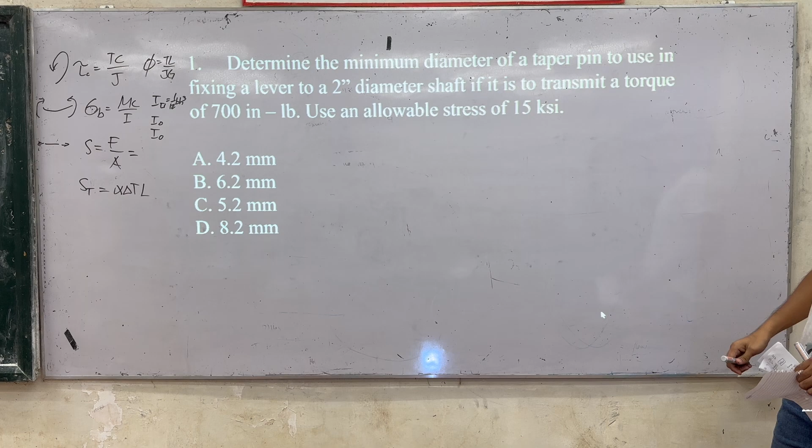So we have here: determine the minimum diameter of a taper pin to use in fixing a lever to a 2-inch diameter shaft if it is to transmit a torque of 700 pound-inch. Use an allowable stress of 15 KSI. So if we have here a pin.

So ano yung mga given dito? Ano yung hinahanap? Compute the stress. Ano bang stress dito? Ito, no? So this is basically yung stress natin, SL over E. So ito, given, ito siya hinahanap. Given ba yung L? Given. Given ba yung E? Okay, given. So therefore, yung S natin is basically delta E over L.

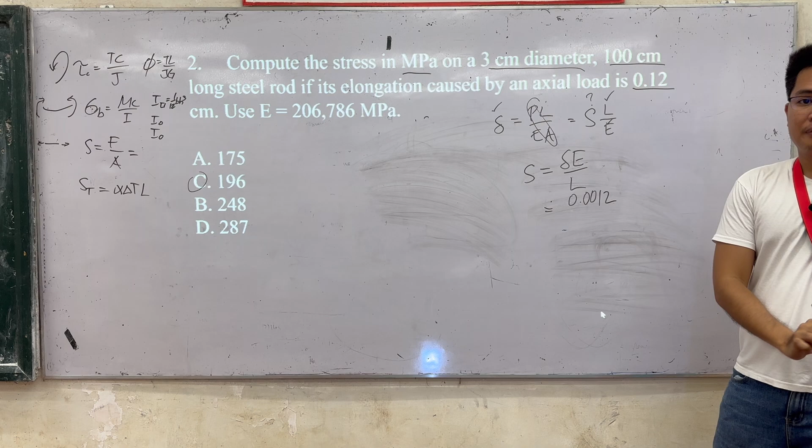So this one here is 0.12 cm siya. So 0.0012, tama? Para ma-meters. And then times E, we have 206,786 times 10 to the 6 over yung L natin. Ano yung L? 100, no? So we have 1. 248. Okay. So the answer number 2 is 248. Klaro?

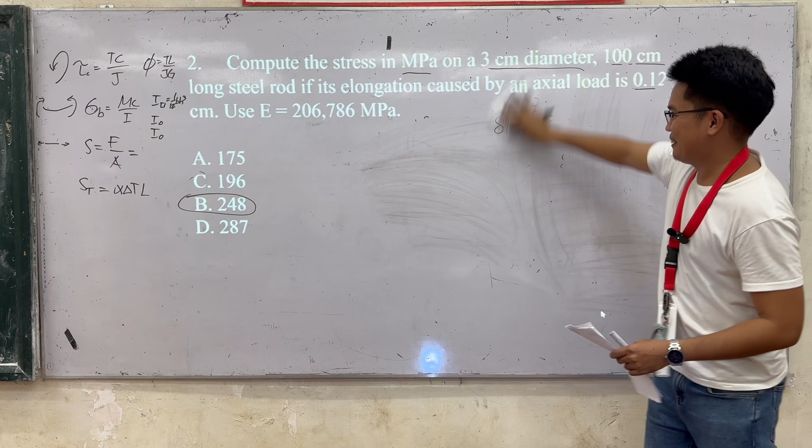Sige, number 3. Makinig. How many 5/16-inch holes can be punched in one stroke in a plate made of SAE 1010 steel, 7/16-inch thick, using a force of 55 tons? The ultimate strength for shear is 50 KSI, no? So meron na tayong plate, no? Yung plate natin is meron tayong mga holes.

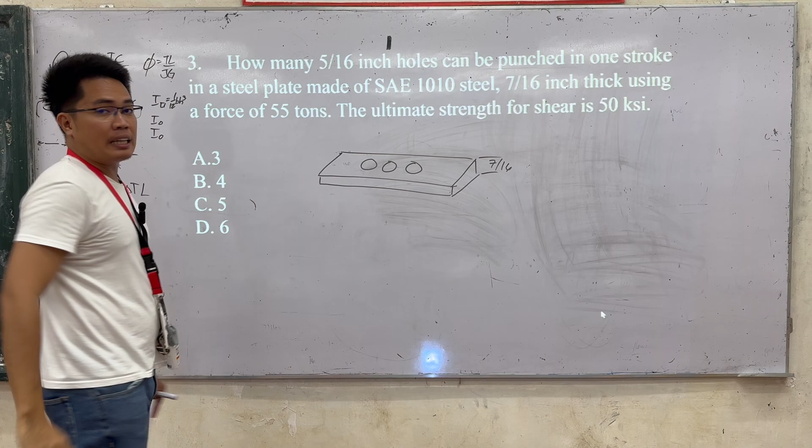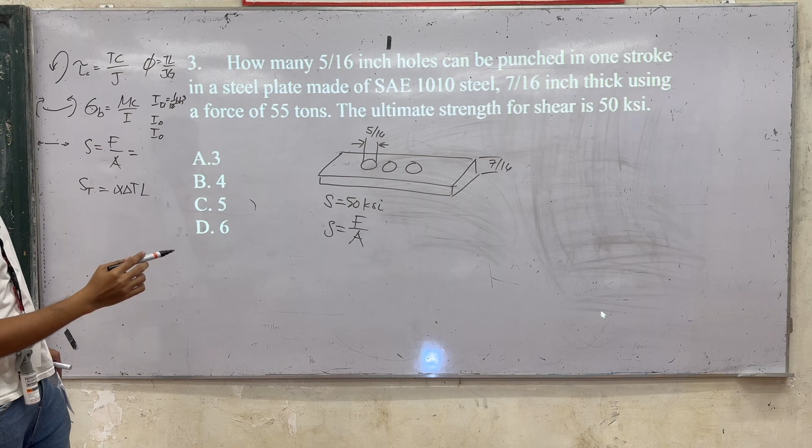And then yung thickness ng plate, given ba o hindi? Given, ano yung thickness ng plate? 7/16. Pero hindi natin alam kung ilang hole. Alam lang natin that yung diameter nito is 5/16. Now, alam din natin kung ano yung ultimate strength for shear. So yung shear natin is 50 KSI. Ano yung formula ng stress natin for shear? We have force over area. Given na tayo ng force? Okay, given tayo ng force, 55 tons.

Now, to calculate the area, ano yung shearing area natin dito? Kung hole natin is pa ganyan, so kung i-stretch natin yan, yan yung shearing area natin, tama? So yung thickness nito, the same as dito, 7/16. How about the length of this one? Paano natin yan kunin? It's just the circumference of this one. So ano yung formula sa circumference?

We have pi d. Pi d lang. 2 pi r yung isa, di ba? So pi d. So ano yung diameter natin? 5/16. Tama? So we have 5/16. So tinatanong ilang holes, no? So lagyan natin ng n para ilang holes yan. So therefore, yung formula natin is n is equal to F over SA.

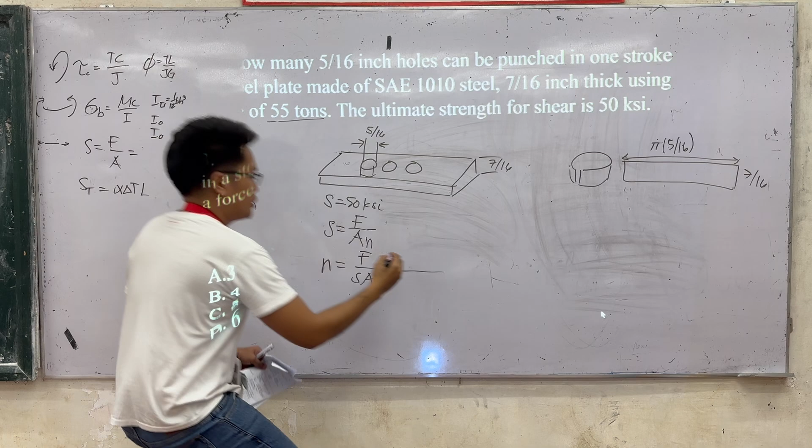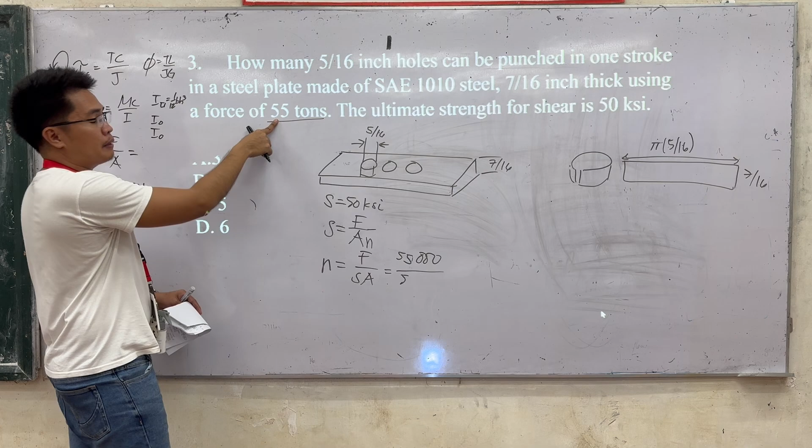So ano yung F natin? 55 tons, no? Tons meaning times 1,000. So we have 50,000. And then yung S natin, ay wait lang, it's 55 pala. Ha? Ano? Then yung F muna, yung F natin is 55 tons, di ba? So 55. Then yung S natin is, ilan yung S? 50, no? So this is 50,000 kasi KSI.

And then yung area natin, this whole area here, base times height lang, no? So ano yung base natin? Pi times 5/16, times height, 7/16. Calculate yung n natin, that is equal to, sige, ito.

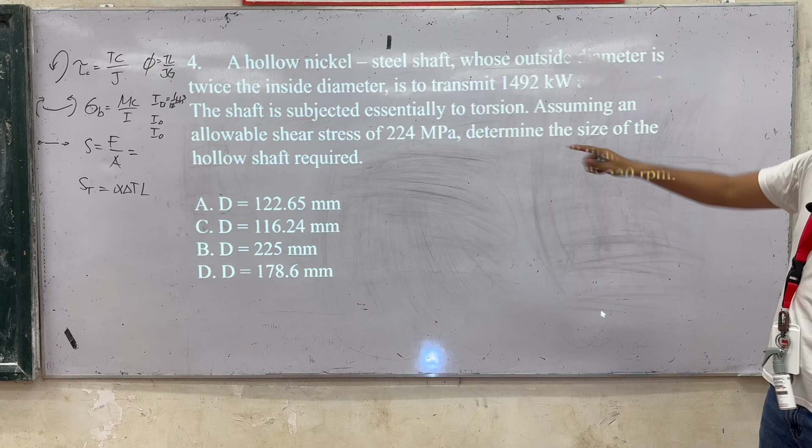A hollow nickel steel shaft whose outside diameter is twice the inside diameter. So ibig sabihin, yung diameter sa outside is equal sa twice the inside, kasi hollow siya. Is to transmit a power of 1492 kilowatts at 220 RPM, omega to. The shaft is subjected essentially to torsion, assuming an allowable stress of 224 MPa.

Determine the size of the hollow shaft required. So yung malaking diameter. Since nag-involve to ng torsion, ano yung formula ng stress involving torsion? The stress is TC over J. And then yung J natin dito, since hollow, that is pi over 32 times D to the 4 minus d to the 4. Now, yung d natin dito is 1/2 D, kasi 2 times. So now we have J here.

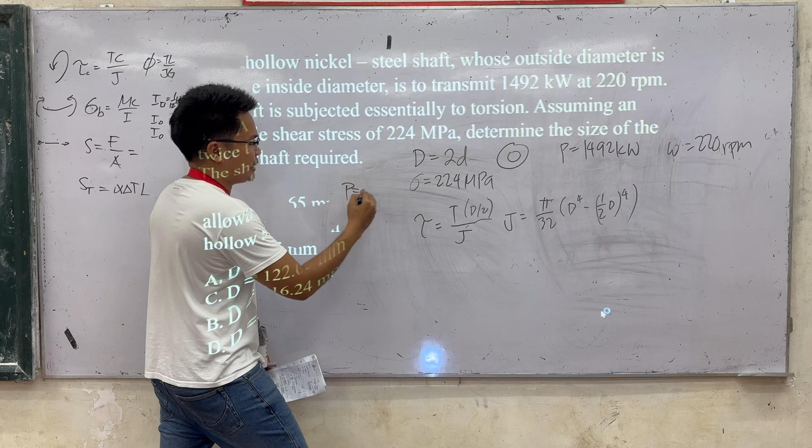Ano ba yung C natin dito? D over 2, yung outermost. So this one here is D over 2. And then ano naman yung torque natin dito, yung T natin? Wala pa. But we know that, ano yung formula ng power? Power is just T omega. Tama? So yung torque natin is just P over omega. So ayan lang, substitute natin. Ano yung stress ulit? 224.

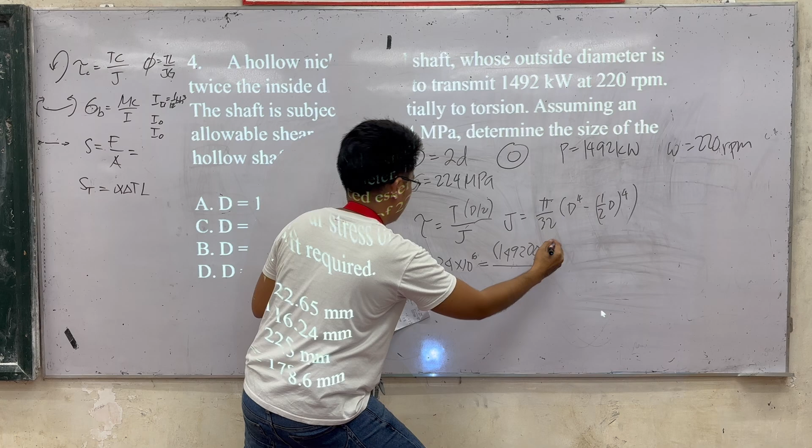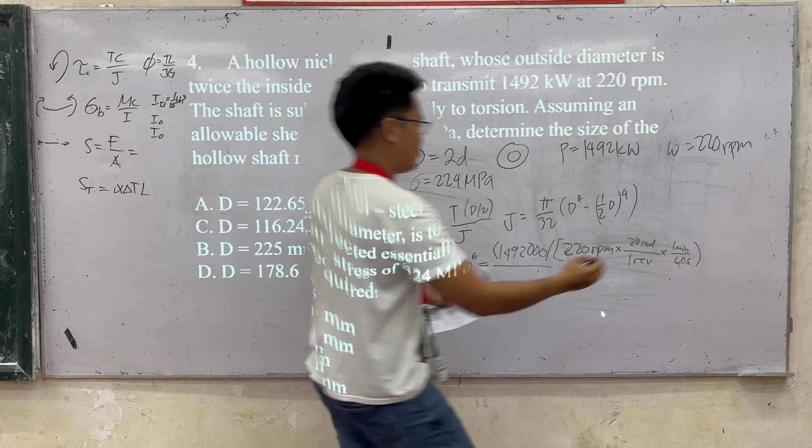So, we have here 220 RPM. Multiply by 1 revolution is just 2 pi rad, times 1 minute, 60 seconds. Yan dapat. Tama ba? Okay. Then ano pa yung kulang? D over 2. So we have here D over 2, over J, which is pi over 32, D to the 4 minus 1 half D to the 4.

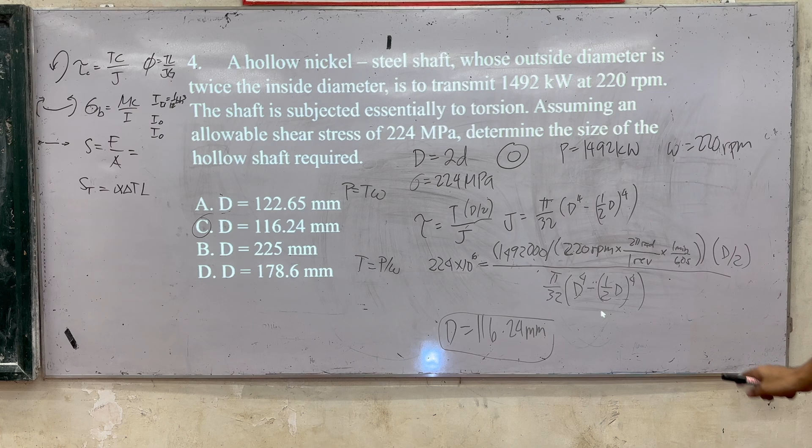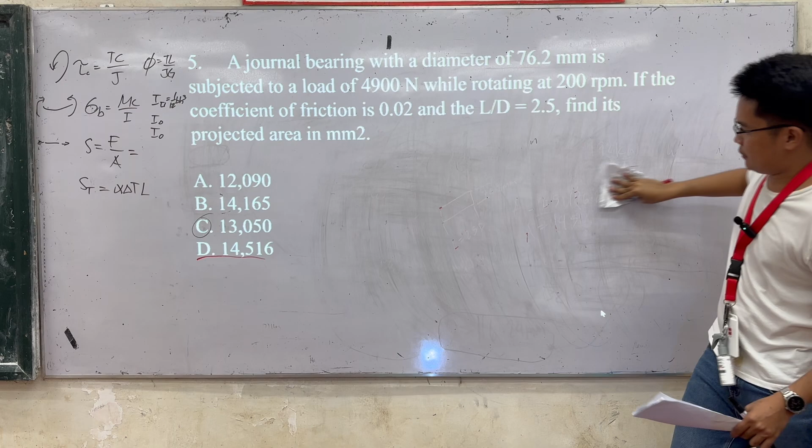Number 6. The shaft whose torque varies from 2,000 to 6,000 inch-pounds has a 1 1/2 inches in diameter and a 60,000 psi yield strength. Compute the shaft mean stress. Paano natin yan i-solve?

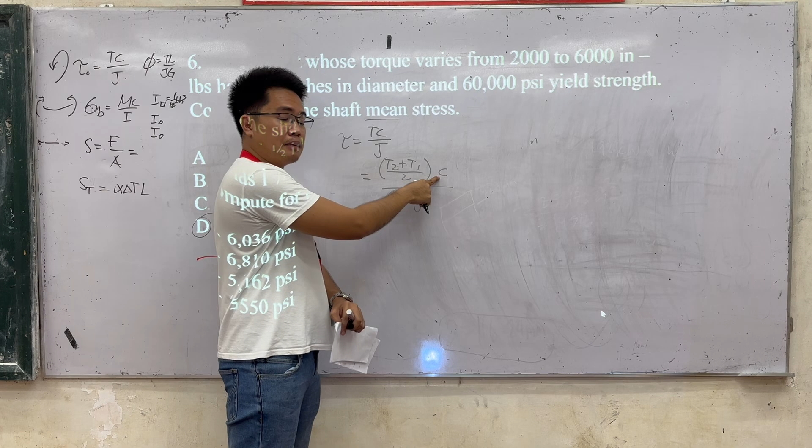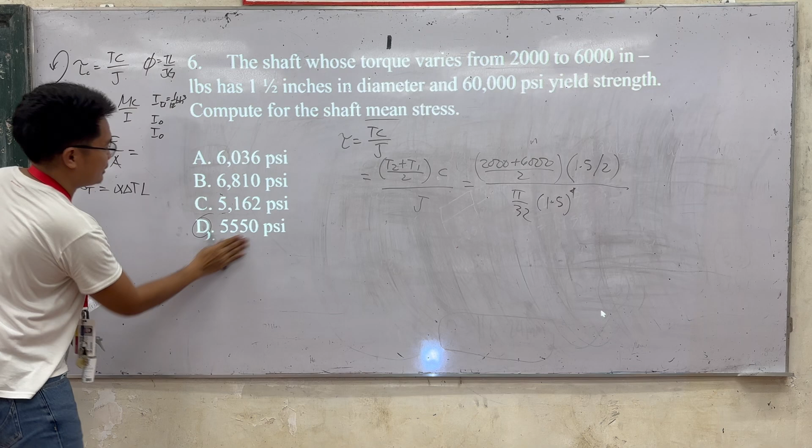So we have 2,000 plus 6,000 divided by 2 times, ano yung diameter? 1 and 1/2, 1.5, divided by 2, kasi yung C natin is just half the diameter. And then, pi over 32. So, we have here 1.5 to the 4. Okay, ito yung sagot, letter A. So, ayan lang. Again, the mean is just the average.

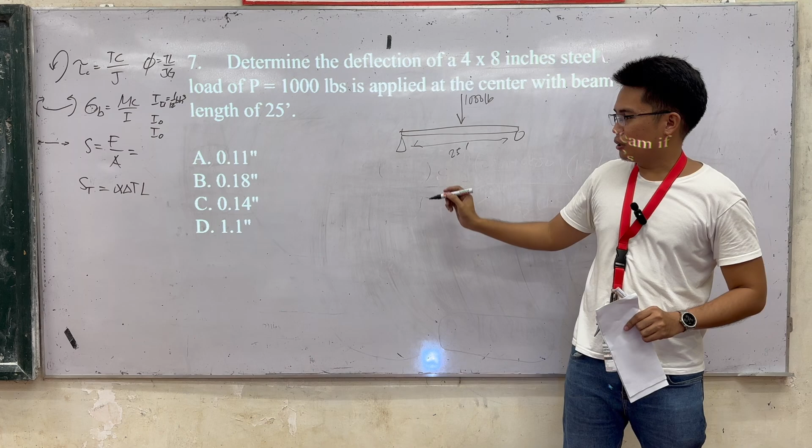So if we have a simply supported beam na may force applied at the very center, yung formula lang is just negative P L cube over 48 EI. Ayan lang. Kasi kapag dinerive mo pa ito sa board exam, mauubusan ka ng time. No? So yung ginagawa is i-memorize nyo talaga yung table. Memorize yung table. So ayan lang.

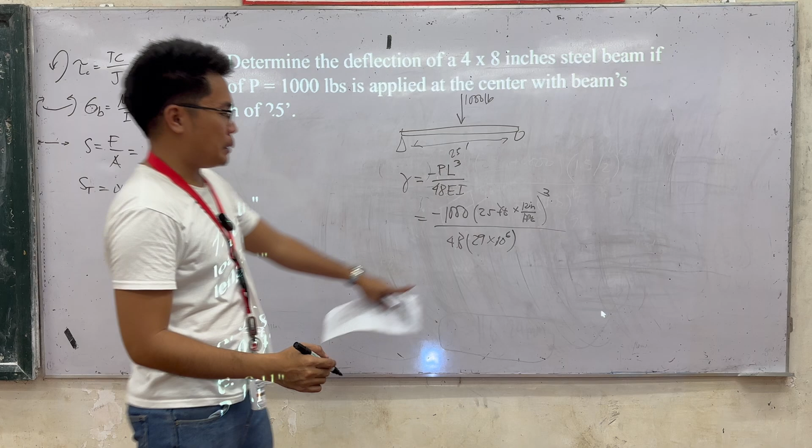So meron tayong negative 1,000 pounds and then yung length natin is 25. So 25 feet times 12 inches over 1 feet. Cancel. So ayan. Cube. Over 48. Then given ba tayo ng E? Pero sinabi na steel. So that is inches yung gamit natin. So we have 29, di ba? Ha? 30 yung ginagamit. 29 ako naandan. 30 times 10 or 29 times 10? Times 10 to the 6, no? Kung GPa to, this is 200, no?

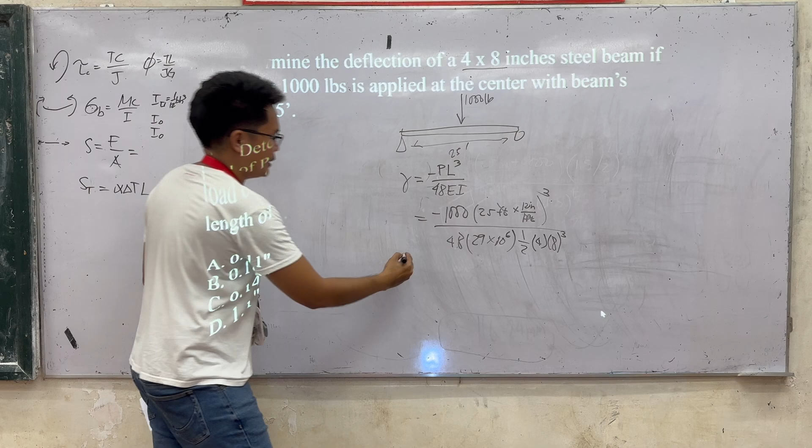So, ayan. And then, yung I natin. Ano yung I natin? Yung I natin is 1 over 12 BH cube, no? Ano yung base natin? 4. Then yung height natin, 8 cube. So, ayan lang. So, yung gamma natin, this is equal to ito, 1 over 12 pala to, 1 over 12 BH cube. 0 point? Okay, 0.11. Letter A.

No? May nakapasa na? May naka-perfect sa 1 to 7? Sino? Siya? Masanang? Ay, Mansang Masanang. Top 1? Congrats, no? Sige, number 8.

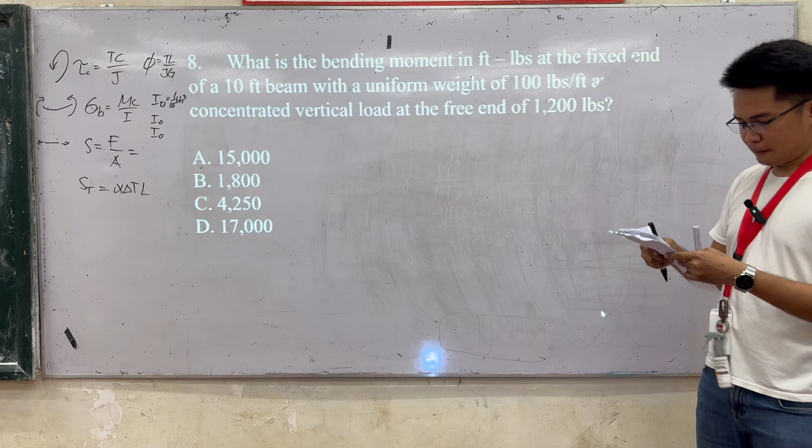What is the bending moment in feet-pounds at the fixed end of a 10-feet beam with a uniform weight of 100 pounds per feet and a concentrated vertical load at the free end of 1,200 pounds. So anong klaseng beam meron tayo dito? We have fixed yung end, so that is cantilever beam, no? We have now a beam. Applied at the end, ano yung force na in-apply sa end? 1,200 pounds. Then meron tayong uniform weight na nilagay dito.

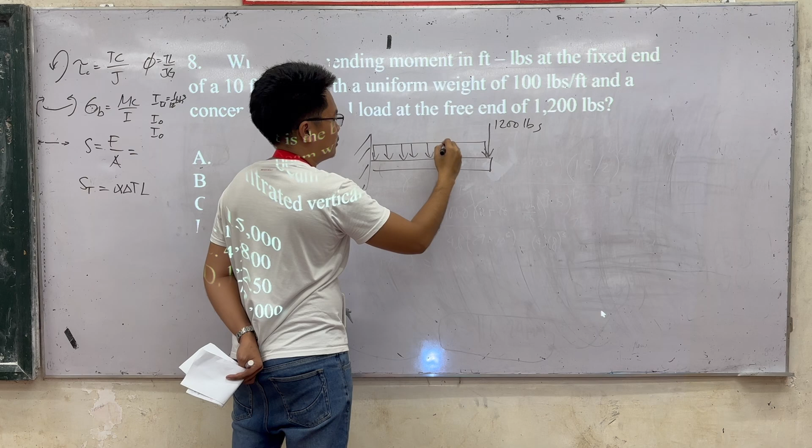That is 100 pounds per feet, tama? Then ano yung feet natin dito? We have 10. Ano yung tinatanong? What is the bending moment, no? So ano yung gagamitin formula? Summation of moments lang. Summation of moment at this point, counterclockwise, positive. So this one here, M, that is positive. And then ito siya is negative 1,200 times, wait lang, this is 10 feet. Lagay lang natin 10 feet.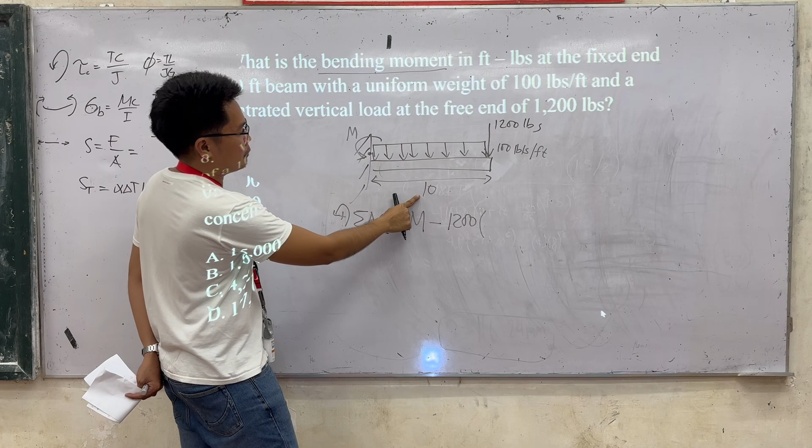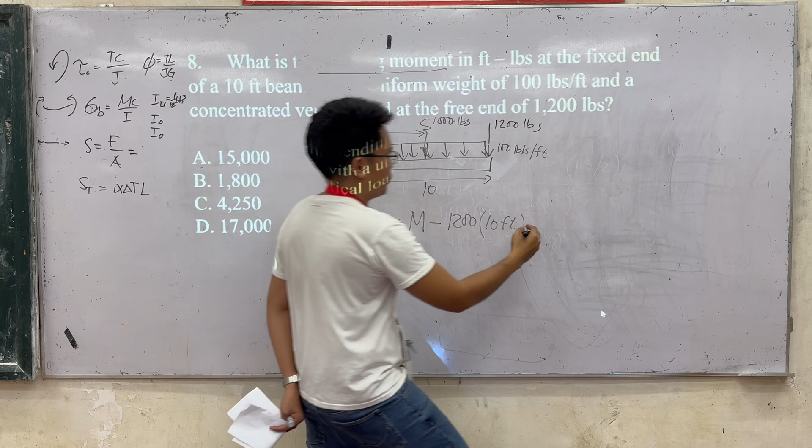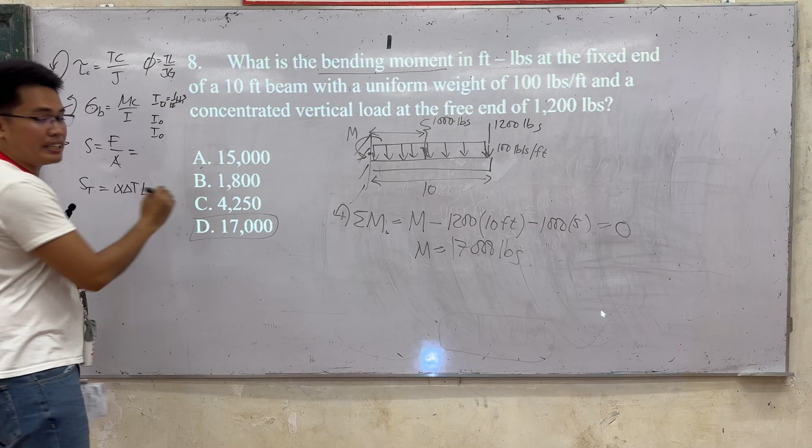And then itong uniform, ano yung gagawin natin dito? Papalitan natin ng concentrated. So that is just 100 times 10. So we have 1,000 pounds. Tama? Then yung moment arm niya, pila? That is 5. So we have minus 1,000 times 5. That is equal to 0. So i-solve natin yung M. Makakakuha tayo ng pila? 17,000 pounds. So we have letter D. Follow? Sige.

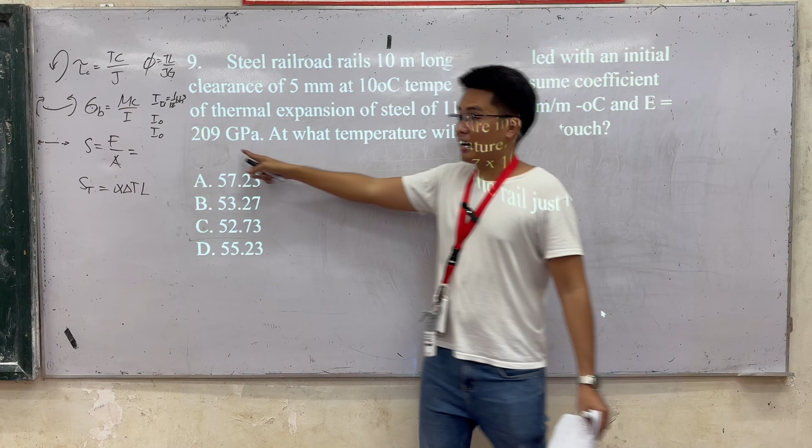Next. Number 9. Steel railroad rails 10 m long are installed with an initial clearance of 5 mm at 10 degrees Celsius temperature. Assume the coefficient of thermal expansion of steel of 11.7 times 10 to the negative 6 and E as 209 GPa, dili 200. At what temperature will the rail just touch? Ano yung rail sa train? So yung rail is ito, dito. Composed na siya ng mga putol-putol. Then may clearance yan, kasi kapag iinit yan, mag-i-expand, so binibigyan ng clearance. So initially, meron tayong 5 mm na clearance at a temperature na 10.

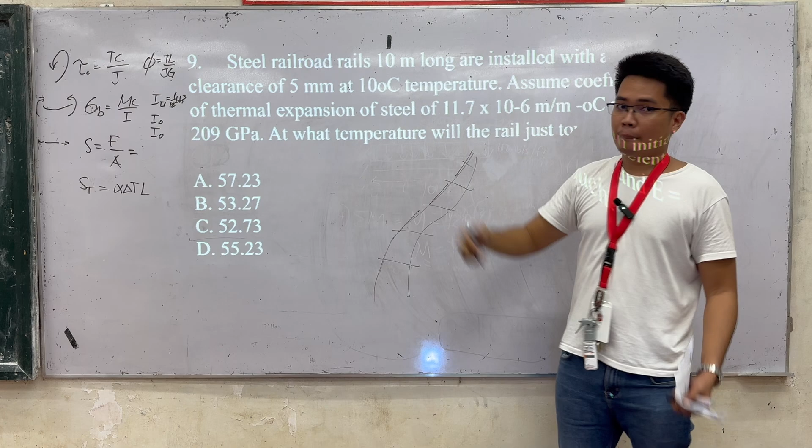So ano yung formula? Deformation temperature. This is our clearance. So ano yung clearance natin? 5. So 0.005 is equal to, ano yung alpha? 11.7 times 10 to the negative 6. And then, ano yung delta T? We have TF minus T initial. Ano yung T initial? 10. And then yung L natin, 10. So ayan lang. So masosolve na natin to. Very simple. So pila na siya?

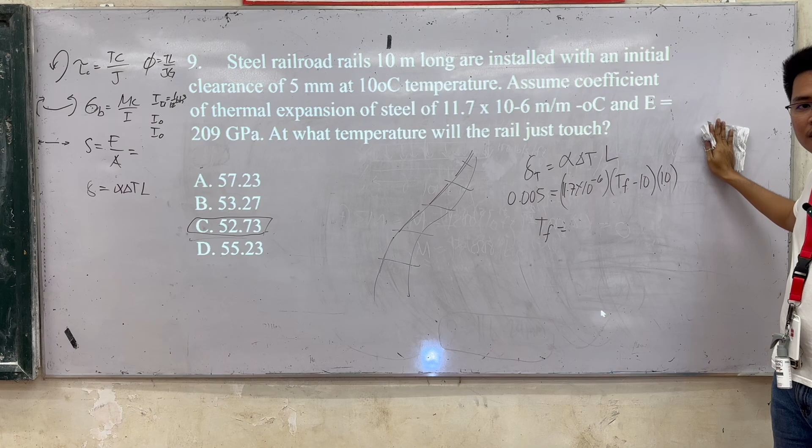Okay, 52.73. Okay? Sige, proceed tayo. Sige, ito daw, easy na to?

Very easy. An 8 inches long steel has a cross-section area of 0.25 inch squared. After a load of 5,000 pounds has been applied, the length is found to be 8.0065 inch. Find the unit stress. So ano yung formula natin dito? Okay, force over area lang, no? So stress is just force over area.

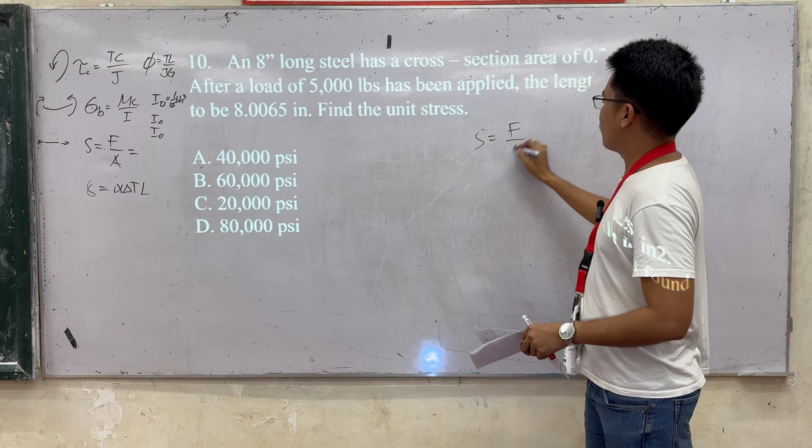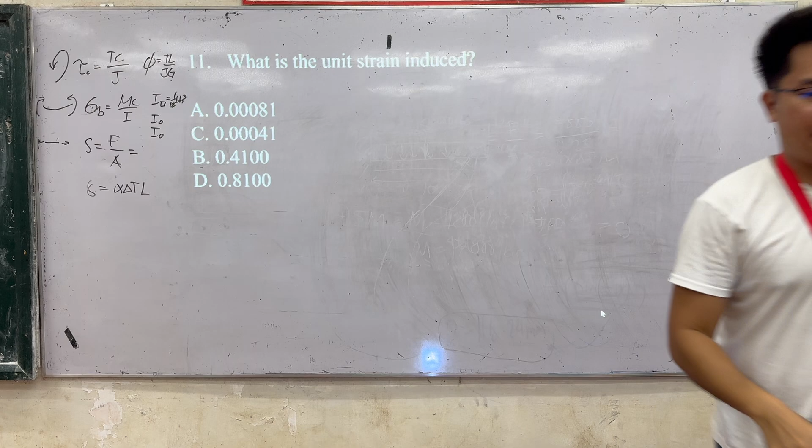Sige. What is the unit strain induced? So yung kanina na problem, i-calculate natin yung strain. So ano yung formula ng strain natin? Epsilon is just delta L over L. Tama? Ano yung delta L natin? Di ba yung original 8? Then nag-expand, 8.0065. So yung delta natin is?

Okay. So we have here 0.0065 divided by 8, the original length. So ito siya, this is equal to letter A? Letter A, salip ko ninyo ha. I-calculate letter A. Sige, letter A.

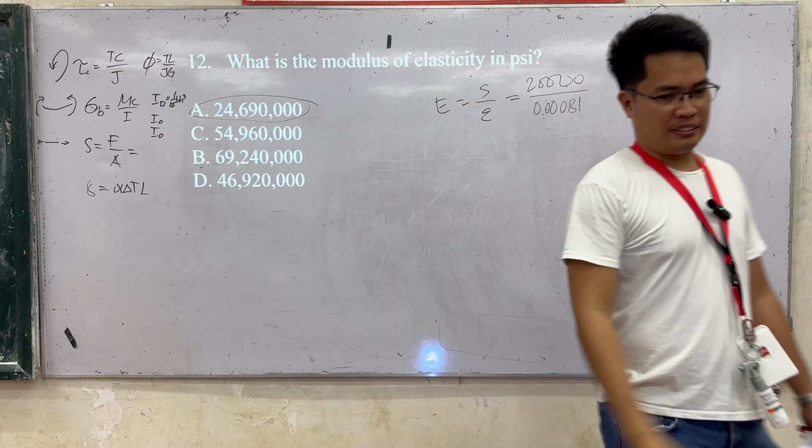Sige, number 12. What is the modulus of elasticity in PSI? Ay, connected siya kanina, no? So we have E is equal to stress over, ano pa yung simbolo ng strain? We have gamma? Sorry. So, ayan. So, the modulus of elasticity in PSI. So, ano yung stress kanina? 20,000. And then, ano naman yung strain? 0.0008. Tatlong zero. So, ayan lang. The answer is? So, letter A. So, sige, number 13.

A hollow steel tube with an inside diameter of 80 must carry an axial tensile load of 330 kilonewton. Determine the smallest allowable outside diameter of the tube if the working stress is 110. So anong klaseng load meron tayo? Axial, no? So if we have axial load, ano yung formula? Force over area lang. Ano yung hinahanap? Determine the diameter. Given ba tayo ng stress? Given tayo ng stress. Given ba tayo ng force? Given tayo dito.

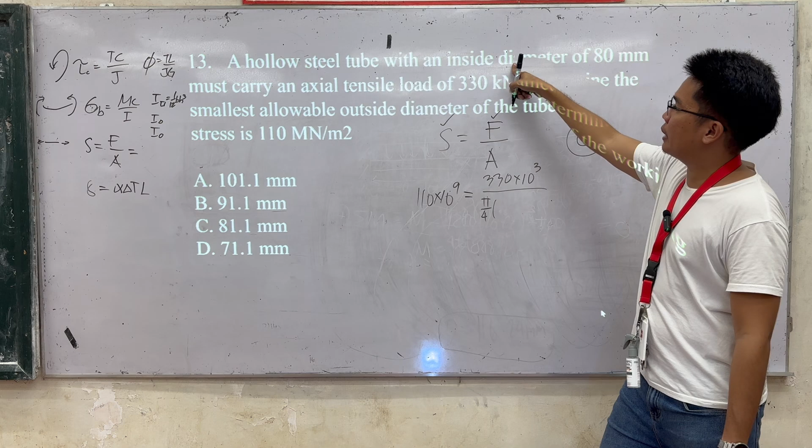Anong area meron tayo? We have a hollow area. So ano yung stress? 110 times 10 to the 6 is equal to, ano yung force? 330 times 10 to the 3. Ano naman yung area? So malaki minus maliit. So ano yung malaki? Pi over 4. Ano yung diameter? Inside diameter yung hinahanap. Tube with an inside. Ay, hindi pala. Ito yung hinahanap, no? D squared, minus, ano yung Di? 0.08 squared. So, ayan lang. Shift solve lang natin to. D is equal to 101.

Letter A. No? Lalo pa, may naka-perfect. Ipopost ko sa taas yung top notcher, ha? Sige. Walang tanong. Follow lang. Number 14. Meron pa tayong 30 minutes.

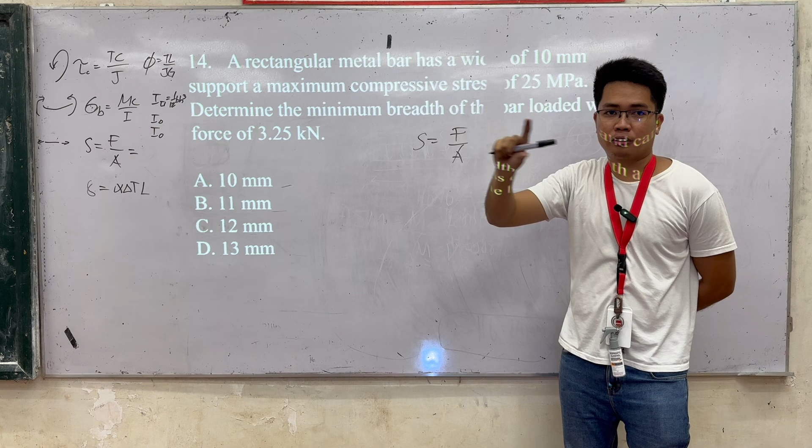A rectangular metal bar has a width of 10 mm and can support a maximum compressive stress of 25. Determine the minimum breadth of the bar loaded with a force of 3.25 kilonewton. Compressive force. Ano yung formula natin? Force over area. So yung stress is just force over area. Now we have a metal bar, rectangular. So anong meron kung rectangular? Base times height lang, no? Yung hinahanap dito is yung base.

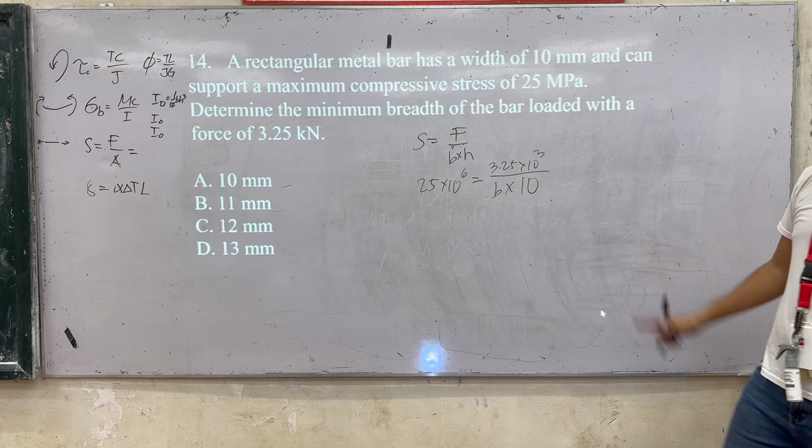So substitute lang natin. Ano yung S natin? 25 times 10 to the 6. Ano yung force natin? 3.25 times 10 to the 3. And then yung base natin, yan yung hinahanap, times ano yung height? Ay, width pala. Pareha na, interchange man, no? Rectangle pa rin. So we have 10. So calculate natin to, makakakuha tayo ng base na 13 mm. So letter D. Tama kayo lahat nito? Oh, yes sir daw.

So sige, ito. We have here a bending moment acting on a triangular cross section. Nakamemorize kayo nito ng I ng triangle? Yan yung mga dapat i-memorize natin kasi hindi yan binibigay, no? Yung I natin sa circle, I sa rectangle, I sa triangle, I sa semicircle. Ito yung pinaka-famous, 1/12 bh cubed. Pero memorize din natin to. Sinabi dito triangular cross section, so yung gagamitin natin is yung I sa triangle. Ano yung I sa triangle?

Okay, 1/36 bh cube, no? Ano yung formula ulit ng bending moment? Okay, MC over I. So yung c natin dito is just D over 2.

Ay hindi, wait lang. Kung meron tayong triangle, this one here is 1/3 ng sa neutral axis natin, 1/3 from the very base, no? So yung I natin dito is 1/36 BH cube.

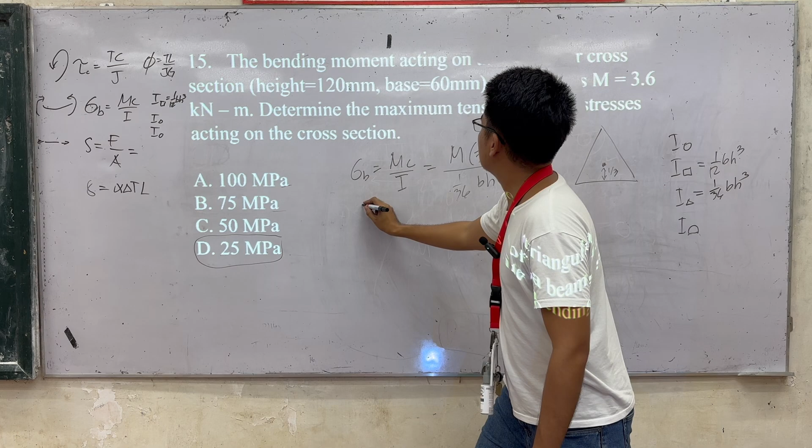Ayan lang, no? Then yung height natin, wait lang, this is 1/3, this is 1/3 ng height natin, h. So substitute lang natin, ano yung base natin? Ay wait lang, yan yung hinahanap, no?

Determine the maximum, tensile pala. So yung moment natin, ano yung moment? 3.6 or 3,600 times 1/3 ng height, 0.12, tama? Over 1/36, yung base natin is 0.06 times the height, 0.12 na to.

And then we have cubed. So ayan, so yung sigma B natin dito is 50. So ito, the answer is 50.

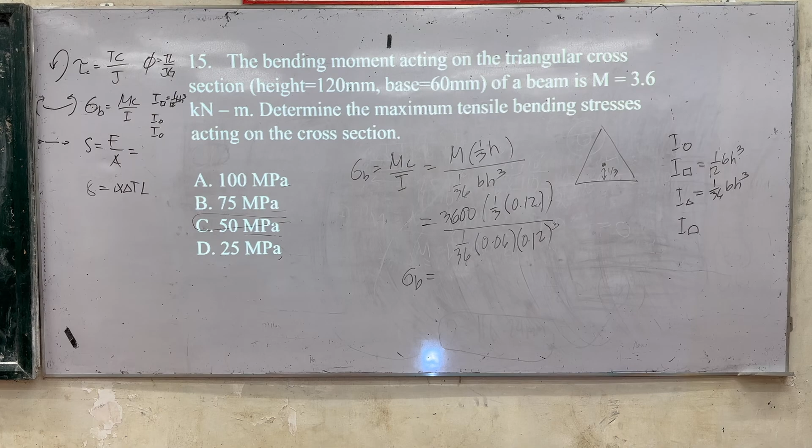16, o ito, lap joint. Paulit-ulit to sa ENS 164. Ano yung lap joint ulit? Meron kang dalawang sheet, ayan, then meron tayong mga holes. May mga pins tayo na pinasok sa holes. And then nilagyan natin ng force na papunta dun. So ayan, so the lap joint is connected by 3, 20 mm diameter rivets.

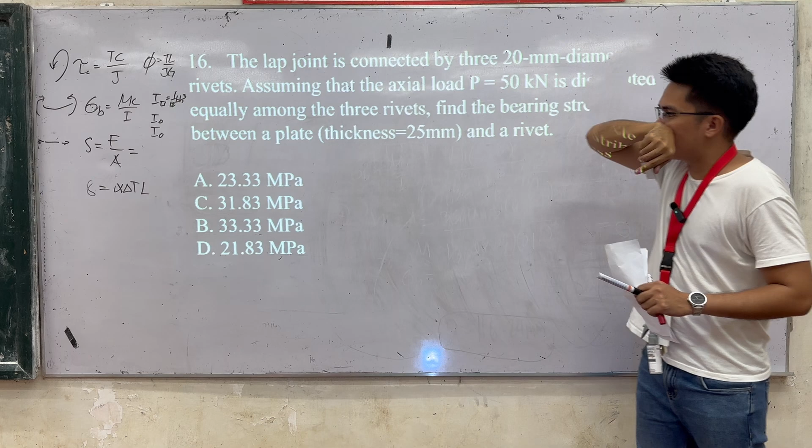Assuming that the axial load P is 50 kilonewton is distributed equally along the 3 rivets, find the bearing stress between a plate and the rivet. No? So kung meron kang...

Basta ma-imagine na ninyo, no? So we have 1, 2, 3. So ano yung bearing area natin? We know that yung stress natin is just force over area, no? So meron tayong ilang bearing area natin dito? Tatlo, so tatlong rectangle, no? Tatlong rectangle, so we have tatlong diameter times thickness.

Tama? Kasi yung rectangle na ma-form dito is diameter times thickness lang. No? So ayan, ano yung hinahanap dito? Bearing stress. Ano yung force applied? 50,000 divided by 3 times the diameter, which is 0.02, and the thickness is 0.025. Okay? Klaro? So ayan, yung bearing stress natin dito is equal to 33.33 MPa, no?

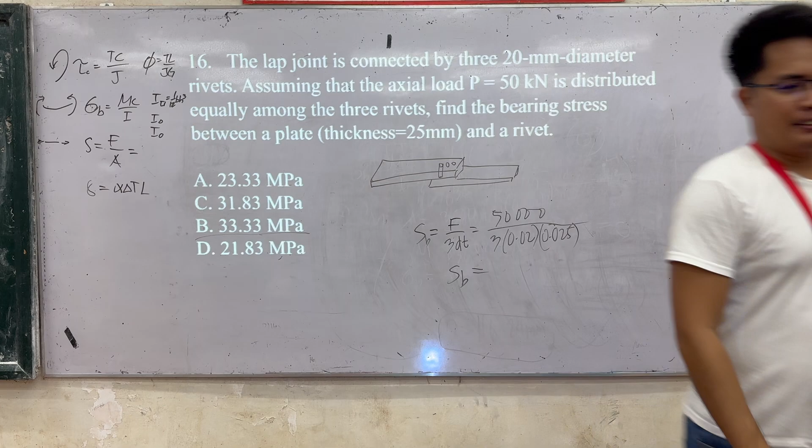Sige, number 17 tayo, apas pa apas. Determine the size of the horizontal section of a square bar which is to be held firmly at one end and to support a weight of 1,600 at the other end. So anong beam meron tayo dito? Cantilever beam, no? Kasi fixed man at one end, which is held firmly at one end, and then ayan, nag-support daw at the other end.

The bar is to be 1 meter long and is to be made from steel with a yield strength of, given pala ng yield strength. Use the factor of safety of 3. So anong ginagawa natin kapag meron tayong factor of safety? Dinidivide lang natin to sa given na stress, no? So ano yung formula natin dito? Ano yung hinahanap? The size of the horizontal.

So bending, bending to diba? Bending, so ano yung formula ng bending? Drawing muna natin, we have here a cantilever. Meron tayong weight dito na 1,600 kilograman. So i-times pa natin by 9.81, so magiging newtons na to. Okay? And then ano yung length niya? 1 meter, okay?

So ano yung formula ng bending? MC over I. So we have, ano yung M natin? Yung moment natin dito, so ano yung moment natin dito? It's just force times the moment arm, which is, ilan isa? We have 1,600 times 9.81. And then ano naman yung C? C natin, anong sabi dyan? Horizontal section of square man, square. No? So square, so yan yung distance na yan.

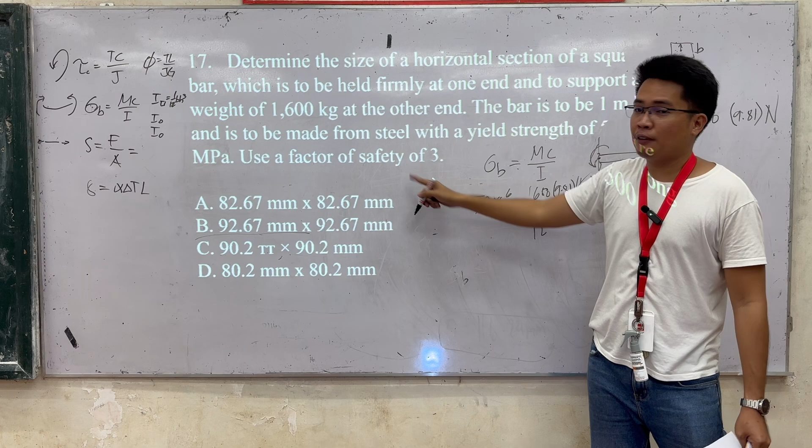Given tayo ng factor of safety. Kung given ka ng factor of safety, automatic yan, i-divide natin by 3. No? Yan yung allowable natin. So ayan, masosolve na natin yung B. Pila yung B dito? 82?

82.67, klaro? Malapit na.

Number 18. What force in kilonewton is required to punch a 20 mm diameter hole in a plate? If the plate is 25 mm thick, the shear strength of the plate is 350. So isa lang yung hole natin dito. Paano ulit i-calculate yung shearing area ng hole? We have here the thickness, which is 25 mm, and then yung length niya is the circumference: pi times the diameter, 0.02. Pi d lang, di ba? Kasi 2 pi r yung circumference.

Stress is equal to force over area. Ano yung shearing strength natin? 350, naka-MPa yan, so that is times 10 to the 6 is equal to force, na yung hinahanap. Ano yung area? Base times height: 0.025 times pi times 0.02. Shift solve, we have our F equal to 549, or that is 550.

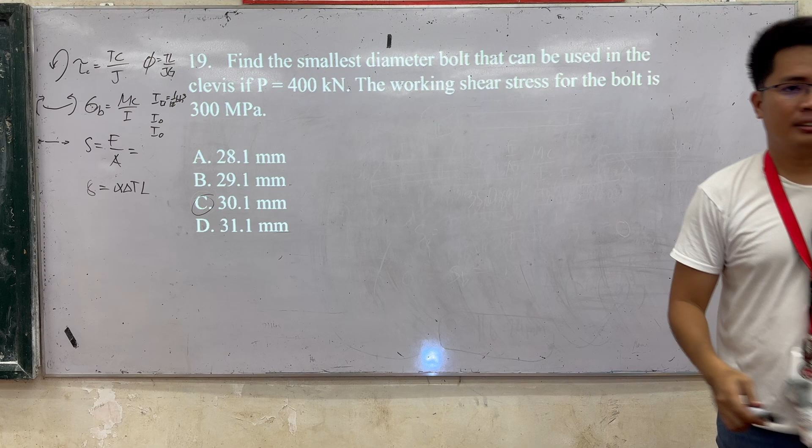Ito din, pabalik-balik tayo: yung punching, tapos yung lap joint, and itong clevis. Ma-remember nyo pa yung clevis? May inattach dito, then may pin tayo dito, dito nakaka-experience siya ng shearing stress. Kung clevis, meron tayong shearing stress na dalawa. Kung meron tayong shearing area na dalawa, ano yung gagawin natin sa formula? S is equal to F over 2A, kapag dalawa yung area natin dito. So substitute lang natin dito.

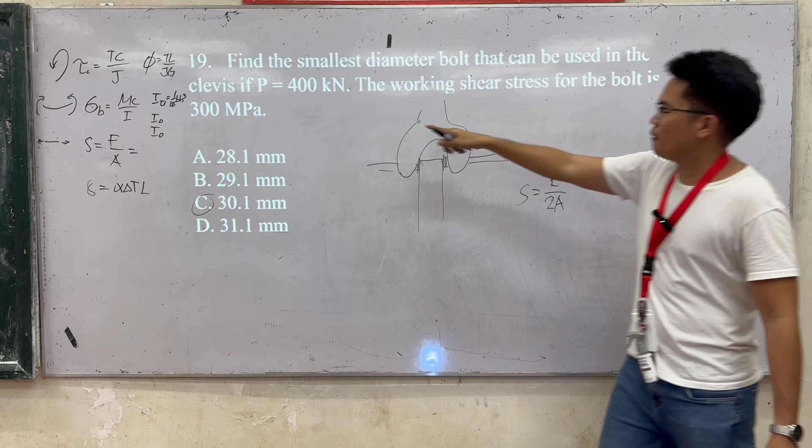Find the smallest diameter bolt that can be used in the clevis if P = 400 kilonewton. The working shear stress for the bolt is 300 MPa. So substitute natin: 300 times 10 to the 6 is equal to force, 400 times 10 to the 3, divided by 2 times area. Itong area dito, circular: pi over 4 times d squared. So masosolve na natin yung d natin dito, diretso na lang ito, wala na tayong time. It's 29, 29.1.

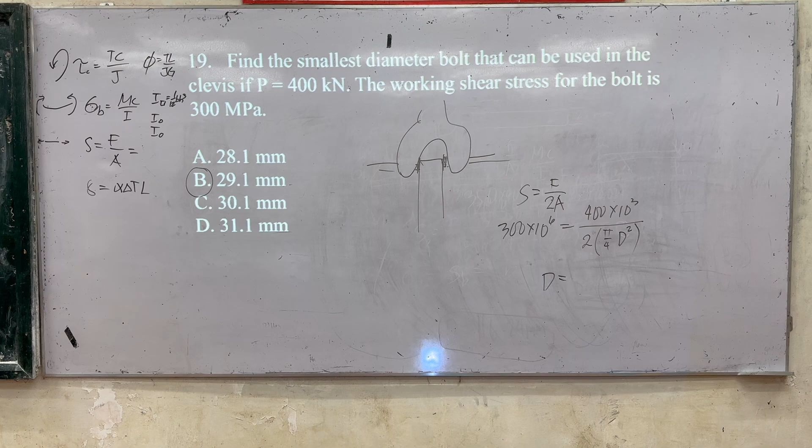Number 20 na, malapit na tayo. A steel shaft, again, kung hindi given yung E, ano yung ibibigay? We have 200, kapag English. 29, 30, sige. A steel shaft, shafting tayo.

3 feet long and 4 inch in diameter, carries the end torque of 15 kip-ft. Determine the maximum shear stress in the shaft in KSI. Ano yung kapag mag-involve ng torsion, ano yung formula ng stress? We have TC over J. Hollow or hindi? Hindi hollow. Ano yung hinahanap? The maximum shear stress. So substitute na lang tayo diretso.

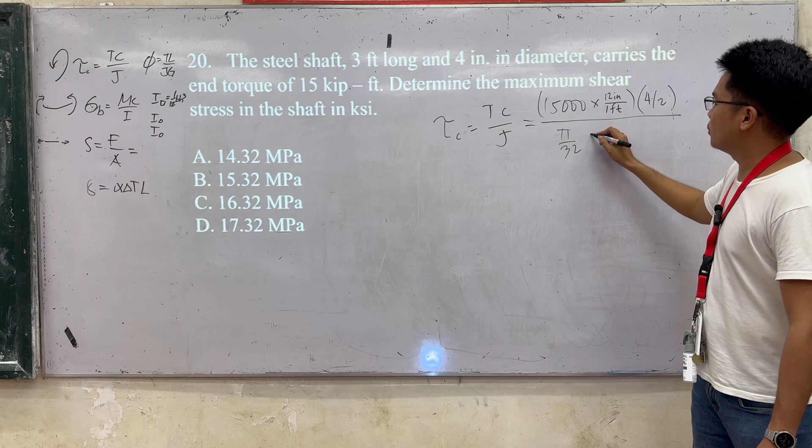Ano yung T natin? 15 kip, feet. So we multiply: 1 foot is 12 inches. Yung C natin, C is just half the diameter. Ano yung diameter? 4, so 4 divided by 2. Over, ano yung J natin? Pi over 32, 4 to the 4. Yan lang, very easy. So yung tau C natin, pila na?

Letter A, 14.32. Letter A.

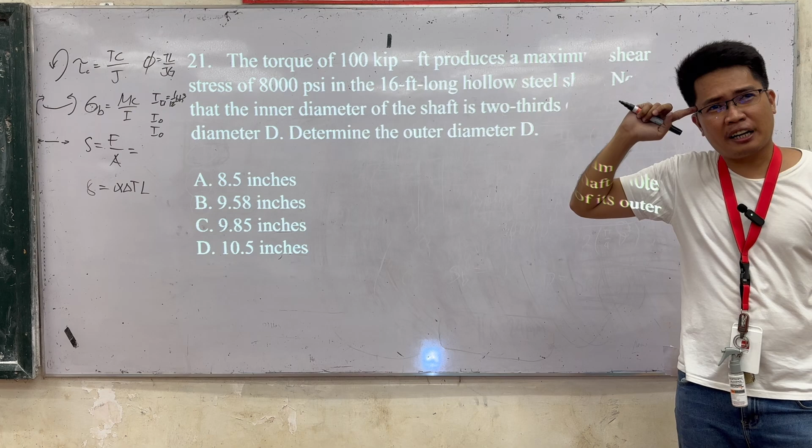The torque of 100 kip-ft produces a maximum shear stress of 8,000 PSI, in the 16 feet long, hollow steel shaft. Sabi dito, hollow. Note that the inner diameter of the shaft is 2/3 of its outer. So anong ibig sabihin, 2/3 of its outer? Yung diameter natin dito, yung D natin dito is just 2/3 of its outer. Determine the outer diameter D.

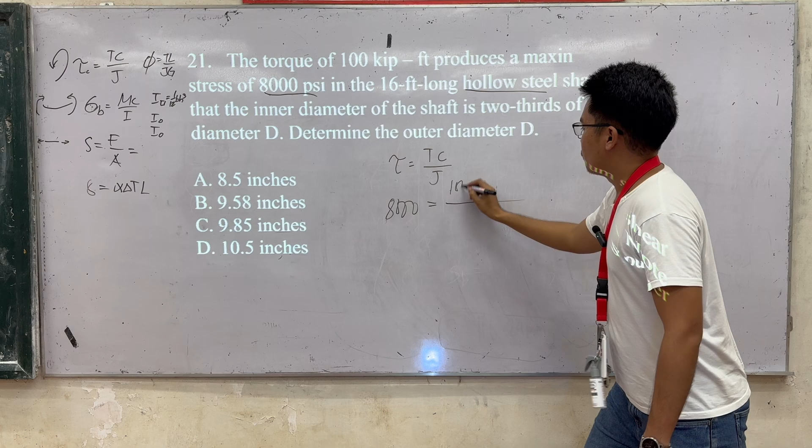Okay, ano yung formula ulit? Tau is equal to TC over J. Ano yung tau natin? 8,000 PSI, tama? So we have 8,000 PSI is equal to, ano naman yung T? We have 100,000 kasi kip, at naka-feet pa, so i-multiply natin para 1 foot. Ano naman yung C? C is just the half of the outer diameter, so we have D over 2.

Tama? How about yung J? J natin is hollow shaft, so ano yung gagamitin? Pi over 32, and ano yung D? D to the 4 minus yung D natin is 2/3 D to the 4. So shift solve natin yan, makakasagot tayo ng D is equal to, ilan na siya?